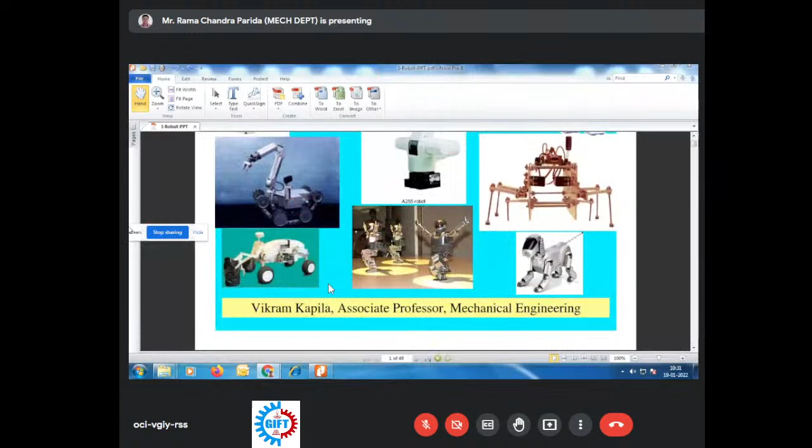Slide is visible? Yes, sir, now it is visible. Okay, so all this what we have discussed in the previous class related to this robot.

The definition of robot was over along with robot anatomy, what are the main parts, like the robotic arm, actuator, end effector or gripper, wrist, and what orientations we can place it like pitch, yaw, roll motion.

Along with this we also discussed robot configuration. Under robot configuration we discussed Cartesian robot, cylindrical robot, polar robot, and the last one, articulated robot.

So all these things we have discussed theoretically, but let's see how it looks and what the robot anatomy and construction part, each part, how it looks, through this class we will be able to understand.

As defined, a robot is a reprogrammable, multifunctional manipulator designed to move materials, parts, tools, or specialized devices through variable programmed motion for the performance of a variety of tasks. This was the definition earlier, and this is given by the Robot Institute of America.

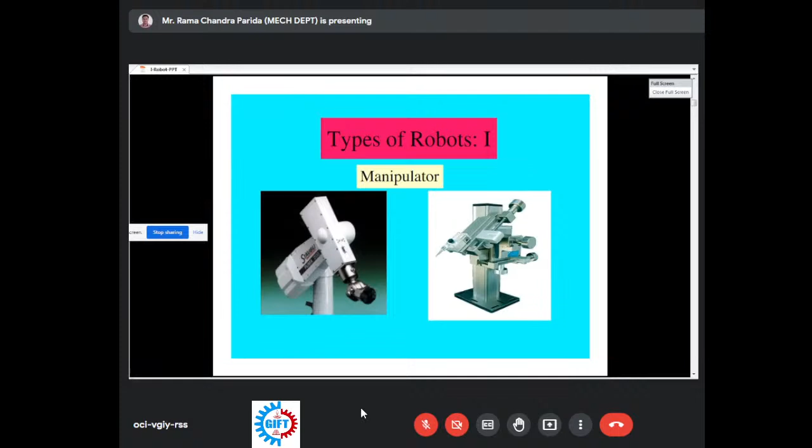No sir, yes sir. Okay, so that means your robot manipulator looks like this. This one is your legged robot, another one is your wheeled robot.

Wheeled robot means, as we discussed, the base of the robot is fixed, yes or no? Its base is movable. So if we attach wheels to move it, it is called a wheeled robot. And if it is moved with the help of legs, two, three, or four legs, if we attach them, it is called a legged robot.

Are you able to identify it or not? Yes sir, yes sir, yes sir. The diagram, what if it looks smaller to you? Please zoom it, you can have a clear picture on it.

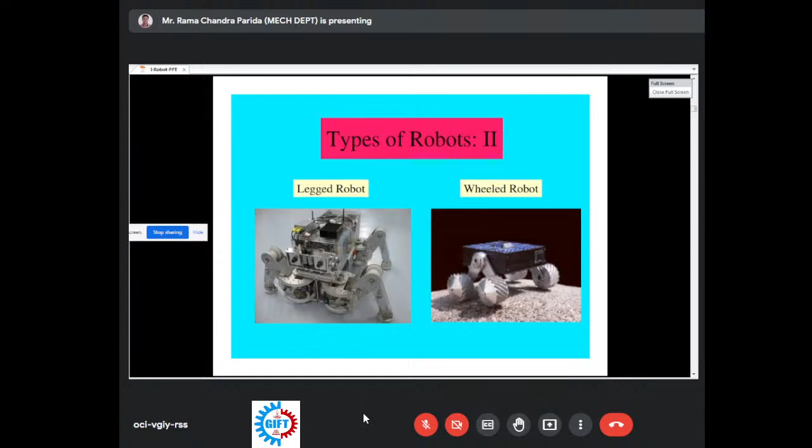So that legged robot, that means the leg is provided along with other components we will also see, and how it looks we will see. I intentionally put these slides here to visualize how it looks. Okay, wheeled robot, clear. Can I move to the next slide? Okay sir.

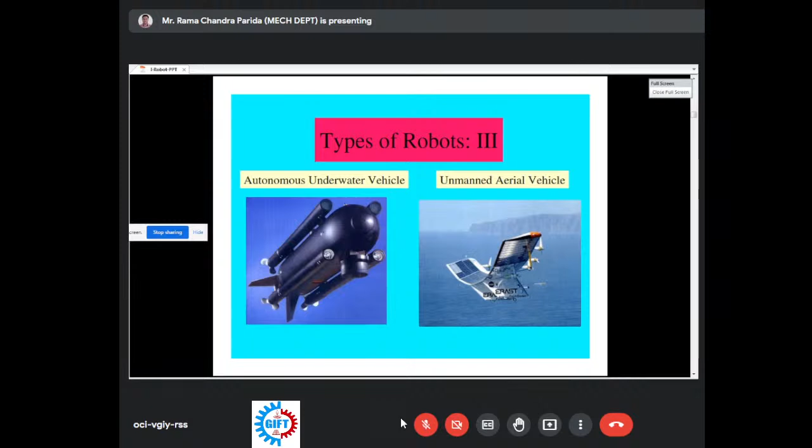Autonomous underwater vehicle. Okay, the one used for naval navigation, in naval systems, like our naval ship, the robot used there also looks like an autonomous underwater vehicle. And also there is the unmanned aerial vehicle. Okay, under types of robot.

So what are the uses of that robot? Basically, as we discussed, jobs that are dangerous for humans, that means jobs which look very dangerous for humans, there we can place a robot to do the work easily.

So cleaning the circulating pump of a nuclear power plant. As you know, in a nuclear power plant, cleaning is also a purpose there. So this is one of the uses. Are you able to see it or not? Yes sir, yes sir. Okay, move to the next slide.

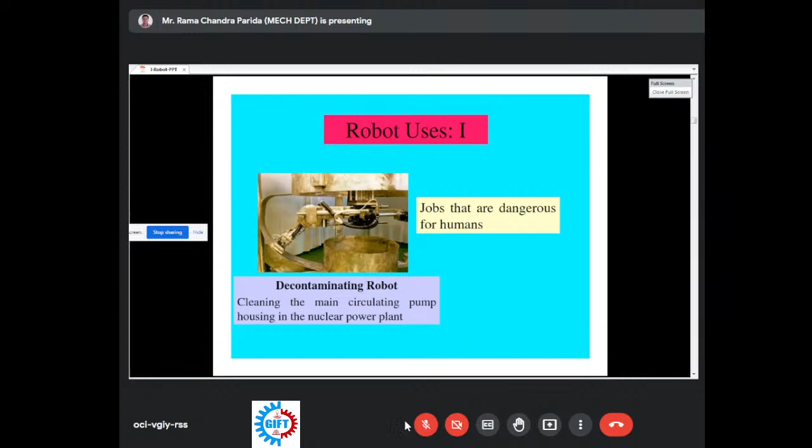You can see that repetitive jobs that are boring, stressful, or labor intensive for humans. That means, suppose, as discussed, if you have joined any organization, and your work is to just stand in front of something and work, to just pick one thing and place it, pick one place one, if this type of job is assigned to you, what will you think? After some time you will feel this work is very boring, I will not do this job. The tendency is the same as you think. So that type of job which is boring, stressful, and repetitive, no one likes to do the same work.

So there we can place a robot also. First was in a nuclear power plant for cleaning. Here, jobs which are boring, stressful, repetitive in nature, there we can also place a robot. Okay, so here this robot is just doing welding.

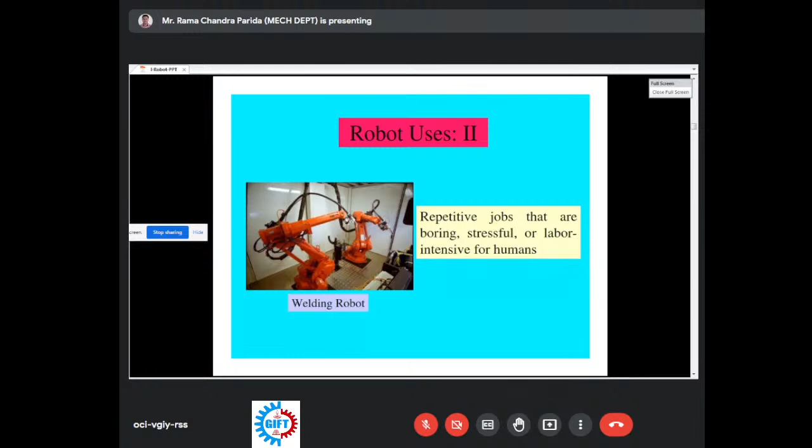Okay, move to the next slide. This is called the SCRUBMATE Robot. This type of robot can be used where humans do not want to do the work. So suppose this is one example I have shown here, this is the task actually no one prefers to do, yes or no?

Yes, sir, there also we can place the robot, but for our own uses we can do such type of work. But for the public places we can't. So there we can place a robot to do such type of work.

So these are the menial tasks that humans do not want to do. So till now what we have discussed, robot can be used for works which are repetitive, which are boring, which are stressful, and which humans do not want to do. Yes or no?

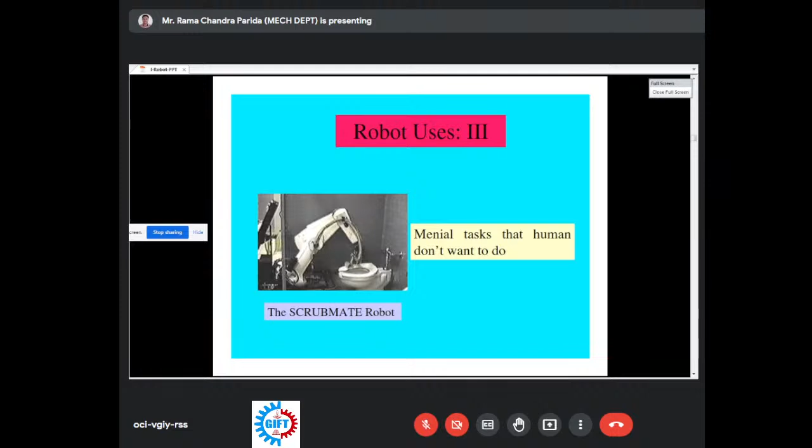Move to the next slide. This is the laws of robotics as given by Asimov, already discussed. So no need to see this slide.

So this is the first industrial robot. Name is Unimate. Please try to remember, question may come in your semester examination: name the first industrial robot. Name is Unimate.

The first reprogrammable robot, who coined the term universal automation. He later shortened this to Unimation. Actually, a robot is a device which works automatically. There is only instruction given by the human, but it works automatically. Hence initially it was called universal automation, or Unimation, which becomes the name of the first robot company in 1962.

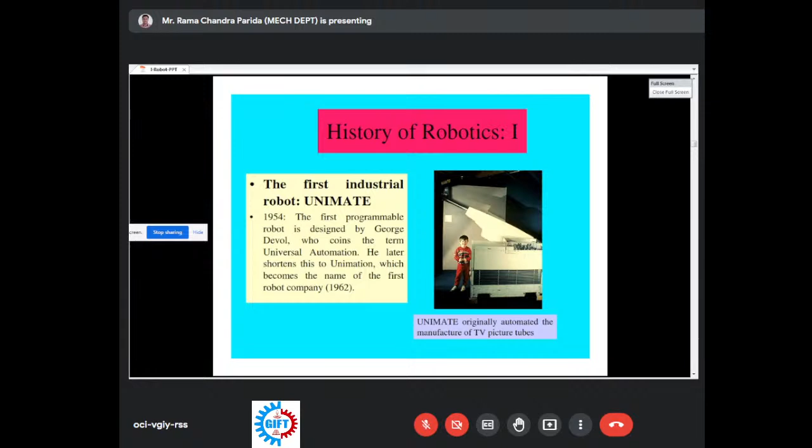So this was the first industrial robot, name is Unimate. Move to the next one.

This is called PUMA, Puma 560 Manipulator. This PUMA is a Programmable Universal Machine for Assembly. This type of robot is used for assembly purpose. Suppose any machine part consists of 5 components, so its work is to just assemble all these parts. Get it or not?

Yes, sir. So if someone asks you what is PUMA, PUMA means Programmable Universal Machine for Assembly. So PUMA 560 Manipulator developed by Unimation.

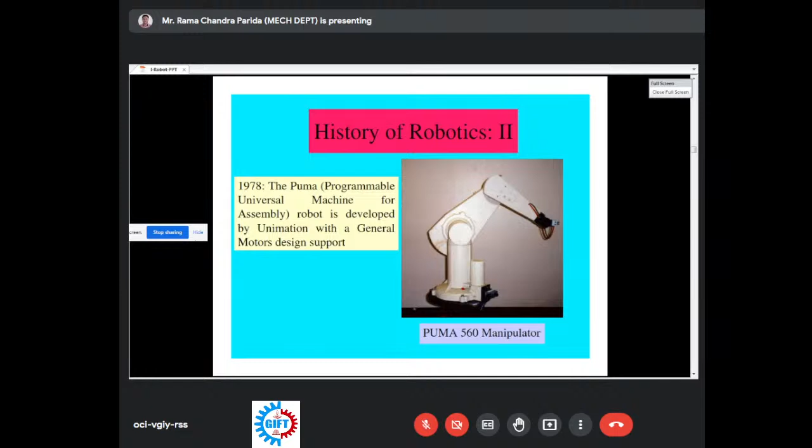This you can see, that means we are just proceeding from 1954 till now. So what type of robots are available? The robot growth happened in 1980. So many institutions introduced programs and courses in robotics. Robotics courses are spread across mechanical engineering.

So first one is Adept's SCARA robot. Second one is Cognex In-Sight robot. And third one is Barrett Technology Manipulator. So these are the robots that show the growth of the robot industry actually occurred in 1980.

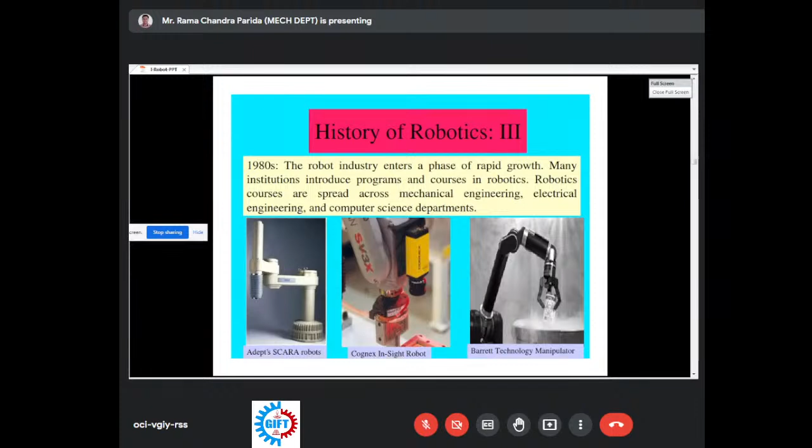So till now what you have learned is what is a robot, what are its configurations, and what type of robots are used in which field.

Now come to the knowledge of robotics. As mentioned, here the concept of mathematics, physics, mechanical, electrical, and computer engineering is used. It consists of main parts like sensors and signal conditioning, actuators, power electronics, hardware and computer interfacing. It is required for a software engineer or computer engineer for programming. For sensor and signal conditioning, we require both mechanical and electrical engineers, and for dynamic system modeling we also require mechanical engineers. So if you take an overview, robotics is an interdisciplinary subject.

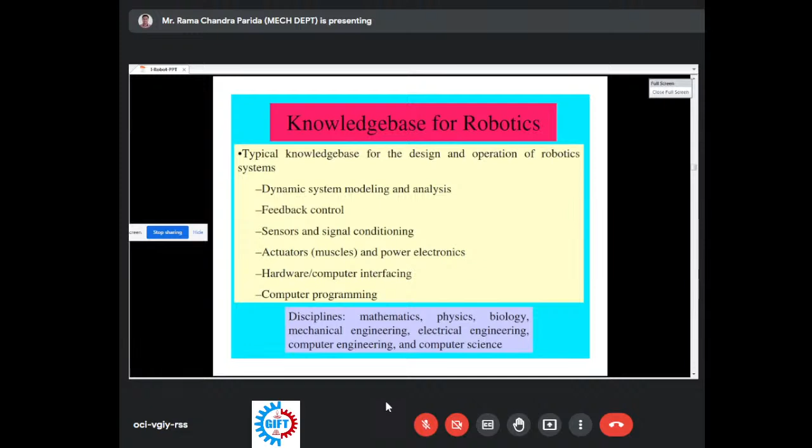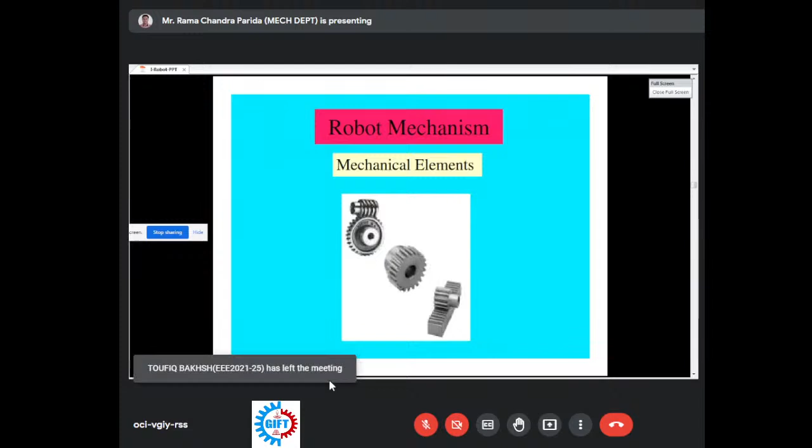Move to the next slide. This is the mechanical elements used in robot, which mechanical engineering students have more to learn. These are gears. Here different types of gears are shown - helical, spur gear - all these gears which will come up further.

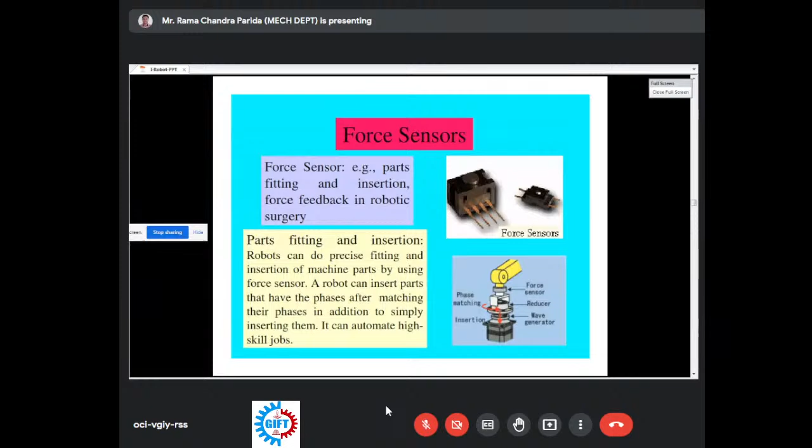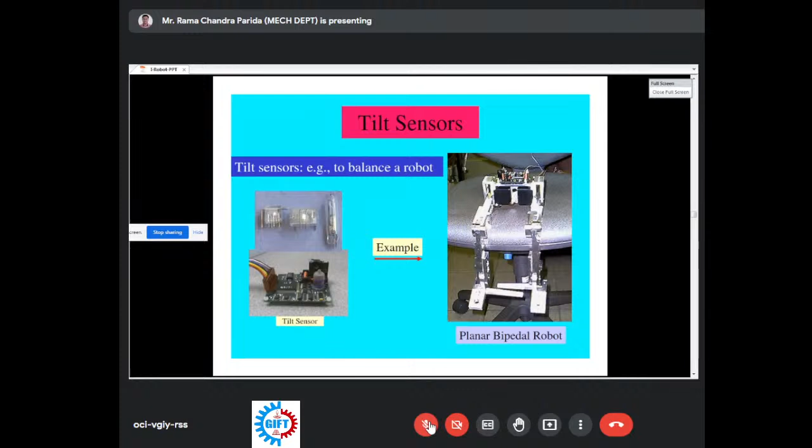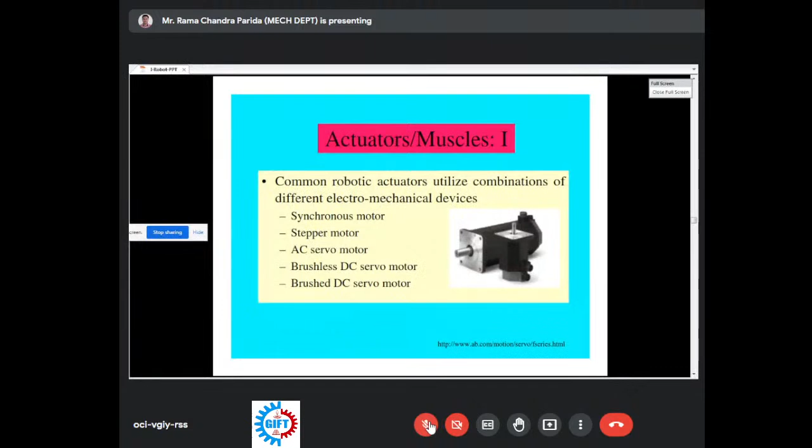Clear आ रहा है। स्टेपर मोटर देखो कैसे दिखता है। आप नेट में भी सर्च करोगे how that stepper motor rolls, what is its function, why we should use stepper motor, आपको आंसर मिल जाएगा। ये देखो स्टेपर मोटर कैसे दिखता है, सर्वो मोटर, डीसी मोटर, ये सारे छोटे टॉय में भी आपको मिलेगा।

आप वो कभी देखे हो सर? कुछ अच्छा? डीसी मोटर सर देखे हैं टॉय में। हाँ, ये different types of motor have you seen or not? एक ही देखे हैं सर, डीसी मोटर। हाइड्रोलिक मोटर देखे हो?

नो सर। चलो एक तो देख लिए। हाइड्रोलिक मोटर आप नहीं देखे हो, because it will actually run with help of fluid force। आपका न्यूमेटिक सिलेंडर जो है, कंप्रेस्ड एयर हम पढ़ाए थे रेसिप्रोकेटिंग एयर कंप्रेसर में, जो कंप्रेस होने के बाद मूव करता है। लैब में आपको एक जगह दिखाए थे सिंगल एक्टिंग डबल एक्टिंग सिलेंडर थ्रू न्यूमेटिक, कंप्रेस्ड एयर से। यह कॉल्ड है न्यूमेटिक सिलेंडर, it is also used to transfer your drive power। सो ऑल these help to actuate your robotic arm।